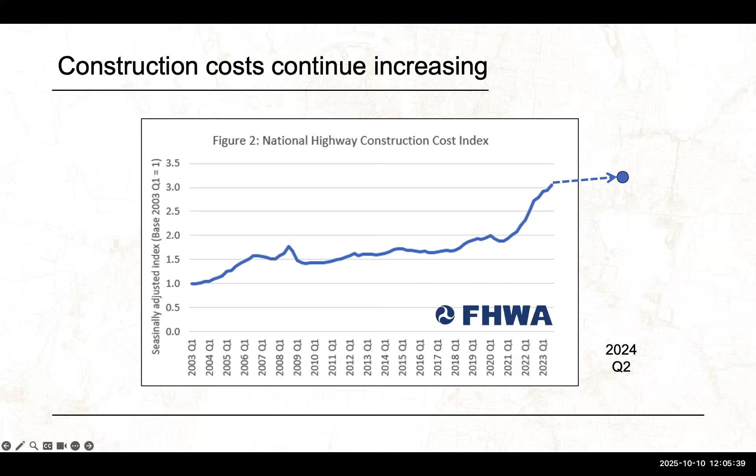All right, I'm going to start off with a nice graph here. This one's from FHWA. This is showing the cost of road building relative to what it was in 2003 and adjusted for inflation. So the trend of building hard infrastructure, paving our roadways and putting up signage and traffic signals and everything has continued to increase. And that trend has continued a little bit. It's flattened off a bit, but overall, building things out in the world is getting more expensive. And paving a new lane on a roadway is more expensive than it's ever been.

A guiding principle of our work is what technology can do to increase the capacity of our roadways, instead of building another lane, which we know is very costly, and we'll end up in this problem of induced demand. You build another lane and that one will get filled up as well. This is a very common theme amongst transportation. Not saying we never need another lane or additional roadway capacity, but what can technology do for us, and maybe do a little bit cheaper than building additional pavement.

The other thing, if you've ever taken a traffic flow theory class or a traffic engineering class, you might be familiar with the fundamental diagram in traffic flow theory. This really tells us at a high level that when you put more and more vehicles onto the roadway and those vehicles become separated by smaller and smaller distances, that's traffic density, so the number of vehicles on the roadway for a given area. When traffic density continues to increase, we can maintain kind of free flow speeds for a while, and then we start to see those speeds drop off precipitously.

So as we continue adding vehicles to the roadway, we'll eventually see the speed on that roadway kind of fall off a cliff, and we get this kind of congestion that we've all been very frustrated by many, many times. So this is another one of these guiding principles, whether we can use this fundamental relationship in traffic to our advantage. Can we get technology to help us with the fundamental laws of traffic and keep us in our nice free flow speeds where everybody's getting where they need to as quickly as possible, and avoid some of this congestion that everybody finds annoying and that ultimately is unsafe? So we'll talk a little bit about how some of our work fits in there, but these are some of the guiding principles that have motivated this talk.

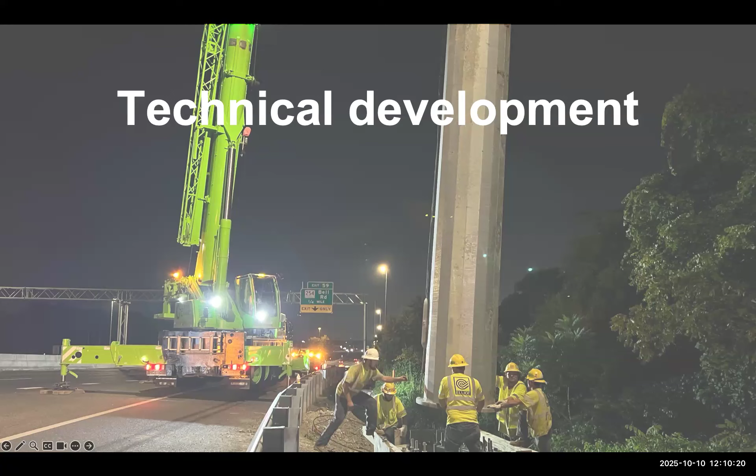So I was kind of out here with the contractors during the building of I-24 Motion and involved in the development since day one. The ITS industry, we know how to hang up a camera to observe traffic. We stick a pole in the ground, you stick some concrete under that pole so it doesn't fall over, you aim the camera at the roadway, and we get this nice view of what traffic looks like. Those cameras, you can pan them around, you can zoom in further down the roadway. And these are really helpful for incident management. And so the traffic management center knows what's going on out on our highways.

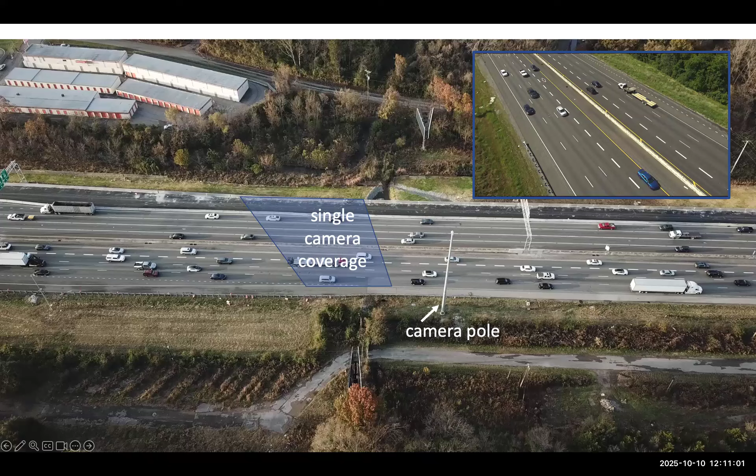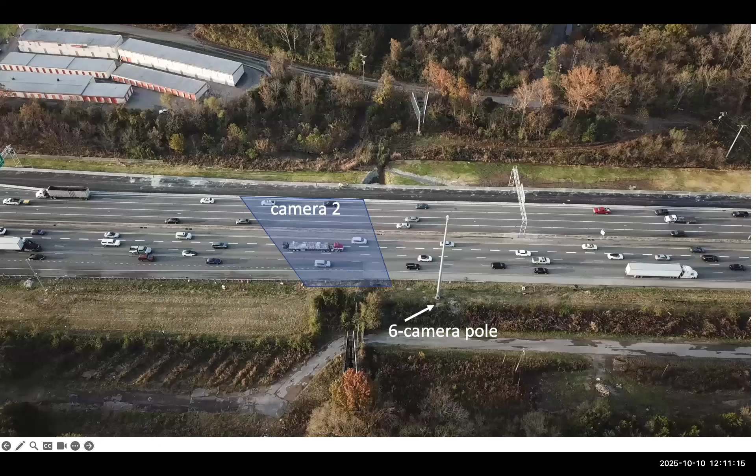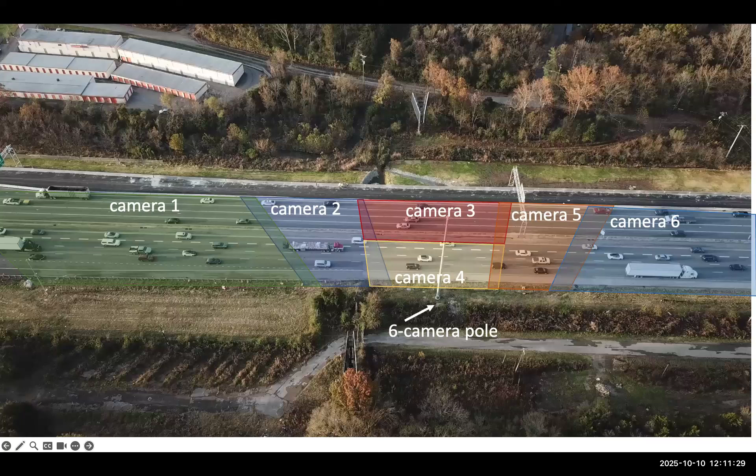However, if we're trying to get sort of observability into all of traffic all at the same time, we need a couple more cameras. This one isn't going to cut it. So again, we start with one, and we need to figure out a way to get a few more up there. Well, this is pretty easy. All we have to do is just bolt them on. Why should this be so hard? Well, if we can do that, all we have to do is duct tape them up there, and we'll get this nice, larger coverage of a patch of roadway from one single camera pole. This will help on cost, so we don't have to install hundreds of these steel poles up and down the roadway. We just have to figure out how to get those cameras up there.

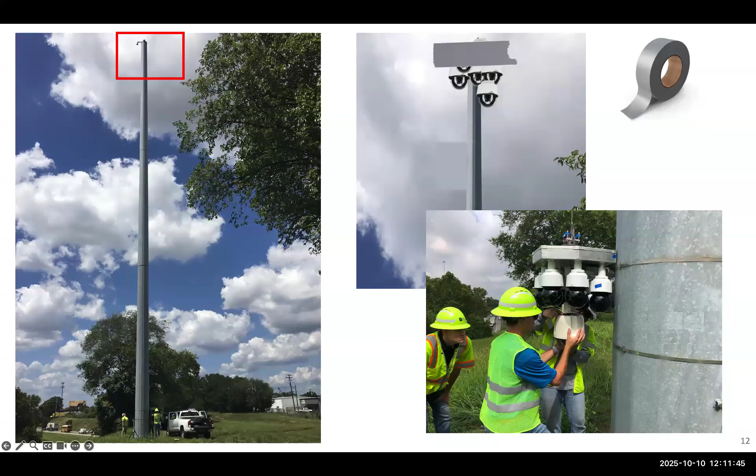We don't use duct tape. We don't even use bolts. This was our very first prototype for actually how to fit 6 cameras up on a single pole. This design did not exactly persist. It was a little bit more fragile than we thought. So we worked with a company down in Alabama to actually make a custom product to hold 6 cameras up on a single camera pole. They're a great partner, and we went through a couple design iterations, and we call this thing the Beetle because it's got 6 legs and holds 6 cameras. But it does a great job of letting us get more pixels on the roadway, use fewer steel poles in order to do that, and let us cover more roadway in this camera coverage.

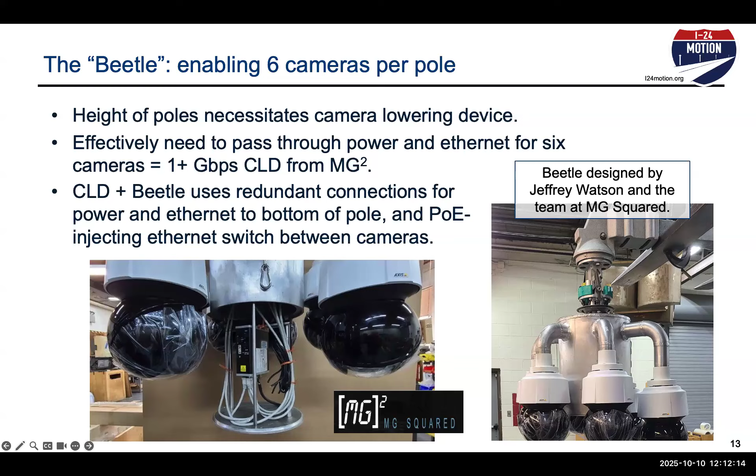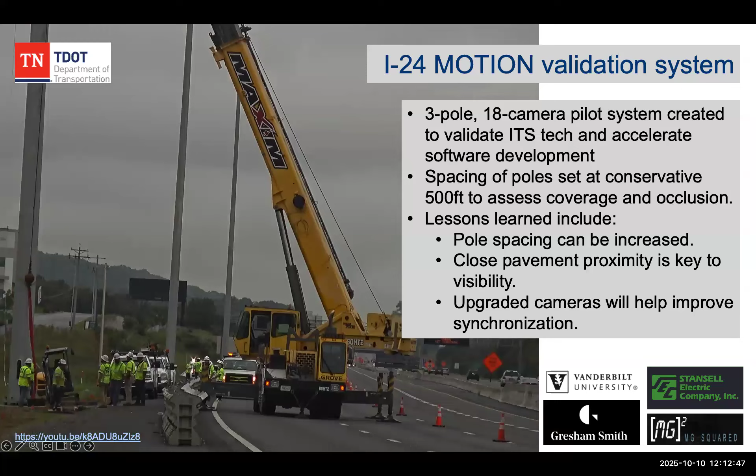When we're actually getting those poles up, this is quite an endeavor because these aren't small steel structures that we're putting on the roadway. These are 110 to 135 foot tall poles. The 135s for I-24 Motion are actually the tallest in the state for traffic. So this is quite the engineering project as well. If you're wondering why they're 135 feet tall, well, they come in 3 pieces, and that's as much as you can fit on a single flatbed truck without getting an oversized permit. So we asked how tall can we make them, and somebody told us 135 feet. We said, all right, deal.

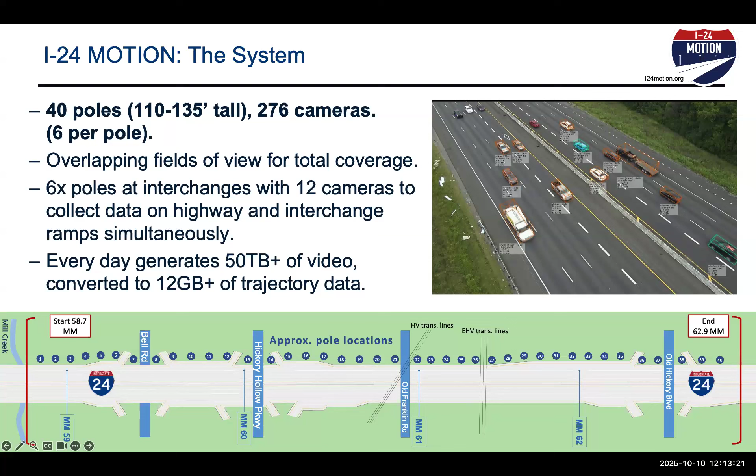So this is a video of us hanging up the first 3 poles. This was part of our validation system. We then started construction on the full system in 2022 and commissioned all 40 of the poles that are part of the core system. That's 276 cameras across all 40 of those poles. We commissioned that system in late 2022, just in time for one of the other projects I'll talk about here in a little bit. But these are laid out across 4.2 miles of I-24, and there's not a single inch of that roadway that we can't see from one of those cameras at a given time.

So we talked about the engineering side, getting these cameras up, and the hardscape and all the materials that go into this. And then there's the cyber side, where we actually pull these data feeds into a data center, and we need to run computer vision tracking on every single object that we can see in all 276 cameras. That is no small feat.

We're even making this harder with trying to do this in 3 dimensions. So we try and get the 3-dimensional bounding box of every single vehicle. And that 3-dimensional box is important because we don't really care where approximately in the image the vehicle is. We want to know where its front and rear bumper are, how wide it is, how tall it is, how long it is, and track that really precisely along the roadway.

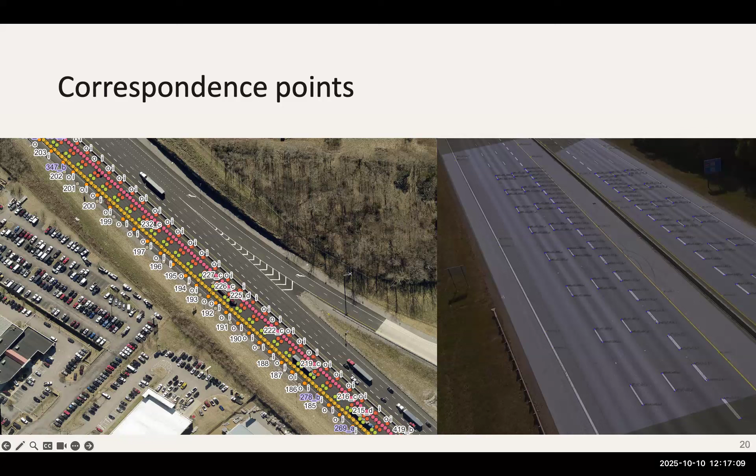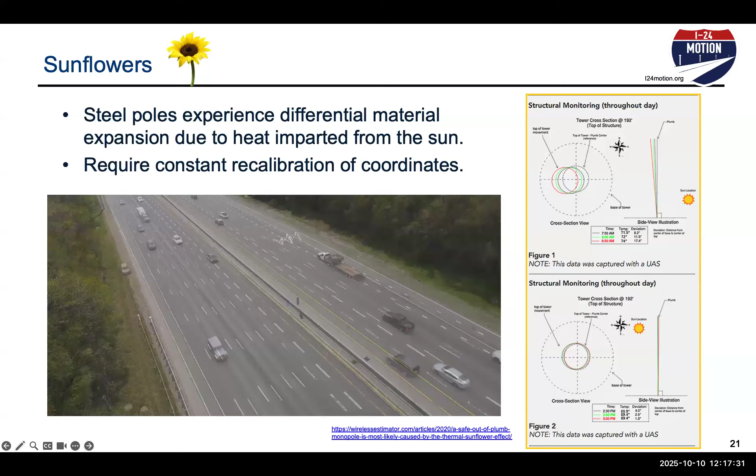So we actually had to develop sort of an auto calibration that uses this initial calibration and constantly reevaluates it every second in order to determine how far the pole is leaning over. You can see this is two images superimposed, and our lanes will actually move by half a lane. So we can get a serious shift in where those vehicles would actually be detected. So this is just one of 1,000 really annoying engineering rabbit holes that we had to go down. But we eventually got all this working.

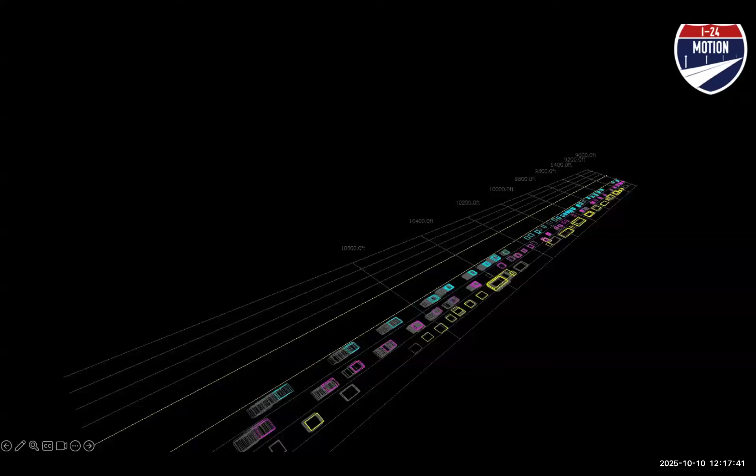And this is actually an early video of what that result is. Once you get all those vehicles correctly localized to the roadway, we can watch every detection. And ultimately, we smooth out these detections. It's a little bit noisy, so we have to massage that data a little bit. But this is what it is after we do that tracking and then localization to a virtual roadway.

All right, what students have seen a time-space diagram before? Yeah, okay, good. All right, so for some of you, this will be new. For some, it will not be. Imagine we lay our roadway out on one of the axes of a two-dimensional plot here. So on the vertical axis, I'm going to give you the roadway, sort of linear, take all the curves out of it, make it a nice line, and put that on your y-axis.

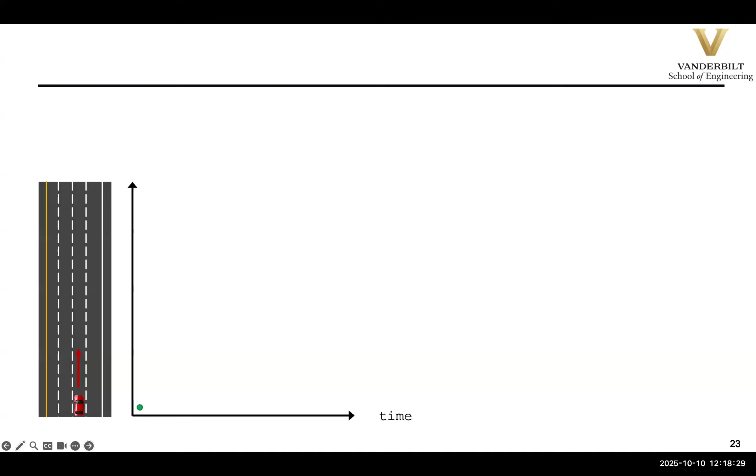Put time on your x-axis, and we're going to plot the position and time of a vehicle as it moves along the roadway. So our little virtual car here is cruising right along at 60 miles an hour, and he has these nice uniform spacing of points. He covers the same space in the same amount of time. Delta x over delta t is the same until he reaches a point where he starts slowing down.

So in this case, I illustrate this as a lane change, but we lay that roadway out, all lanes in the same plane. But if that car is slowing down or encounters a traffic jam, for instance, we'll see the slope of that line start to bend, and it'll start to flatten out.

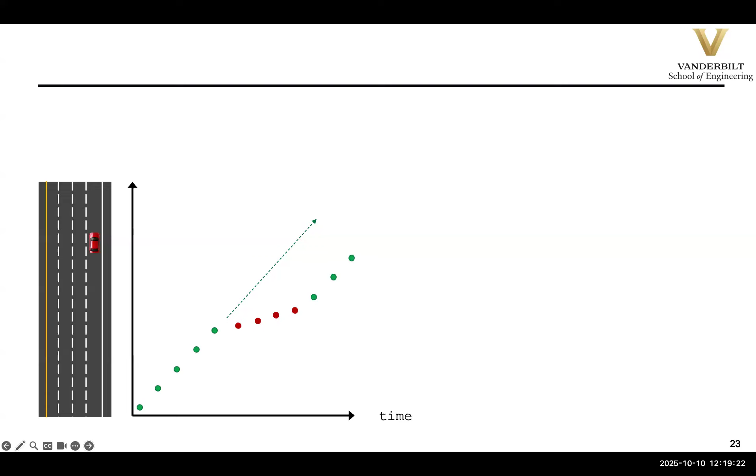And in fact, if he completely comes to a stop, we'll see a perfectly flat line because time is advancing and he's going nowhere. So this is how you read one of these time-space diagrams. If he starts up again, then we'll see that line, the slope return to its kind of free flow speed. So we're just measuring slope here, and we can do that for the I-24 MOTION system.

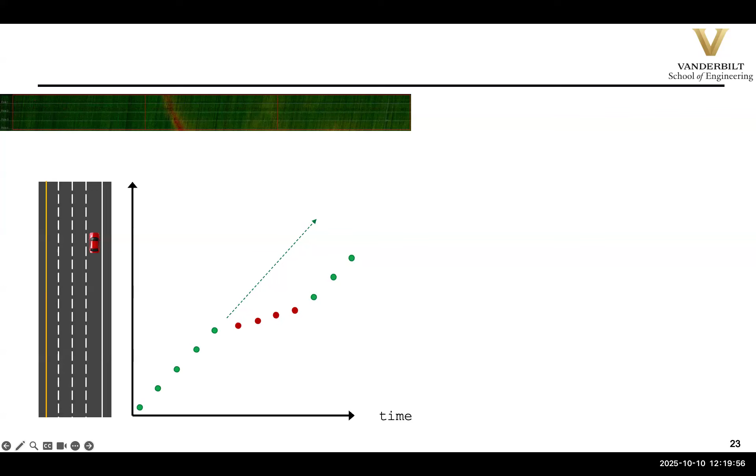This tiny little diagram up here are some of those trajectories for individual vehicles, except I cropped this photo by basically the amount of data that the traffic flow theory community was using that was of this same quality. So individual vehicle positions over time. This is how much data we are dealing with. So y-axis is space, x-axis is time. So we had about 45 minutes across, I think it was 1,500 feet. So small data set. And this was the first day of I-24 MOTION on the same scale.

So we have 4.2 miles of roadway on the y-axis, and you'll see on the x-axis, we have, in this case, I think about 6 hours. So this is actually morning traffic. What you're going to notice here, all these nice straight green lines here are free flow traffic. And then these red streaks here, we'll examine one of these once this comes to a stop, but these red streaks are traffic waves. So they're moving traffic jams.

If you can envision somebody coming to a stop behind you in a traffic jam, and behind them somebody else coming to a stop, and another car and another car, we start to build this queue, and that queue builds backwards along the roadway. So our vehicles are driving in this direction, kind of towards the top right of the image, and our traffic waves are actually traveling in the opposite direction, backwards along the roadway as time advances.

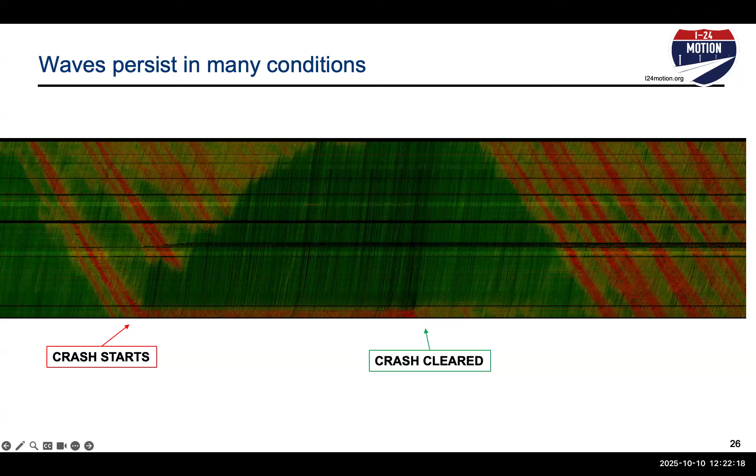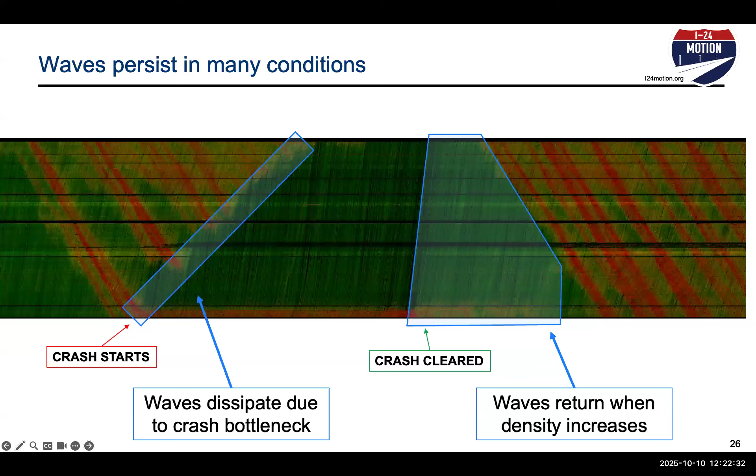You see this kind of sparse area. There are definitely vehicles going through, but there aren't as many. You can just tell by kind of the density of green there. Well, that crash is cleared at this moment, and all those vehicles rush through where we previously had a bottleneck. They rush through, and traffic actually returns to this traffic wave state. So we created a bottleneck, choked off the flow, and then as soon as we opened that back up, these traffic waves returned. So we see this quite a bit.

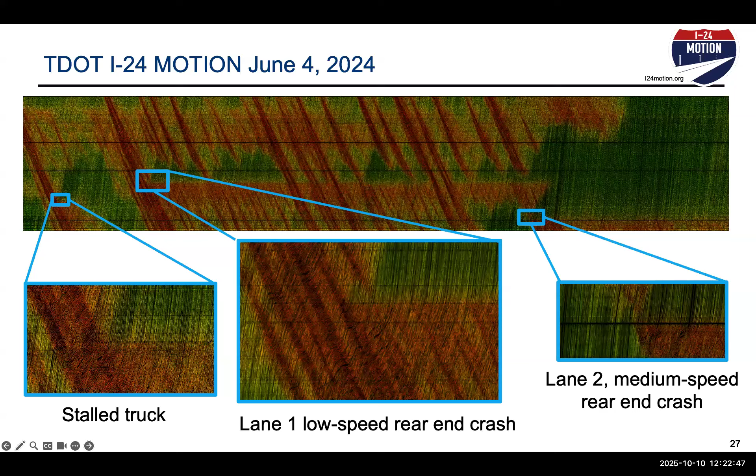In fact, here are a couple other sort of phenomena we've seen. This is just a very low speed rear end crash. However, that causes a lane to be blocked. It causes police activity, and we see these things day in and day out. We can look at months of this data. In fact, we have hundreds of days of it at this point, and we see crashes all over the place. So once you get kind of good at looking at these things, we look at them every single morning as the data is produced. You see crashes without a moment's hesitation. So I-24 is a really rough, dynamic roadway. It's not very pleasant to drive, and this is one of those reasons.

So this is all about traffic observability. And let's segue really quickly into the I-24 Smart Corridor. You might be wondering, well, this is fine and good. You observe traffic, you see these phenomena. What do you do about it? So the Tennessee Department of Transportation embarked on the I-24 Smart Corridor project back in, oh gosh, it's been quite a while, I think 2018 kind of era.

And their intention here was adding another lane to I-24, which was going to cost about $2 billion at the time. So $1 billion per side to add one more lane. If you're wondering why it's so high, well, the roadway slopes off really dramatically on that side. You have to acquire right-of-way property on that side because the roadway is already kind of at max width. You'd have to rebuild bridges and interchanges. It'd be a ton of work to add one more lane to that highway.

So can we use technology, again, coming back to our theme, can we use technology to increase the capacity of that roadway, smooth out traffic, make that commute more pleasant for everyone? So that was the overall objective with I-24 Smart Corridor. And the way that we went about that was installing digital message signs along the roadway, and they're actually in these sort of clusters of smaller digital heads. So they're not that full lane spanning message board.

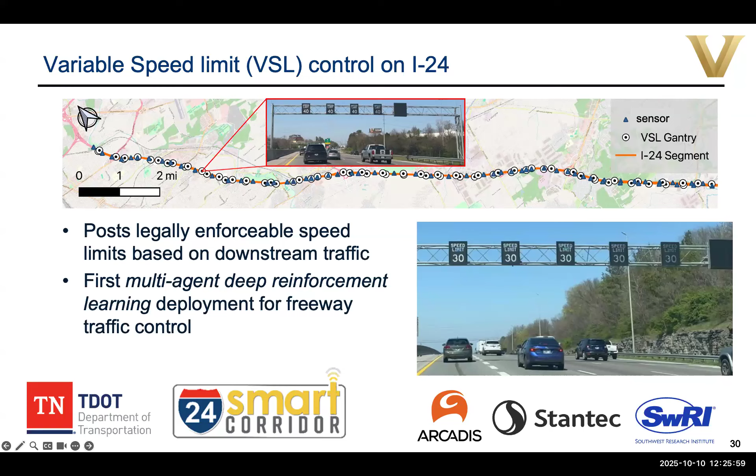So we wrote this software to implement this AI algorithm in 2021 and 2022. And it went live in early 2023. So what I'm going to show you today are the results from that deployment and what positive effect, if any, it had on the roadway. Spoiler alert, it was positive. Otherwise, I probably wouldn't be talking about it today. But this has been a really great project by the Tennessee Department of Transportation because it achieved the exact objectives it set out to do.

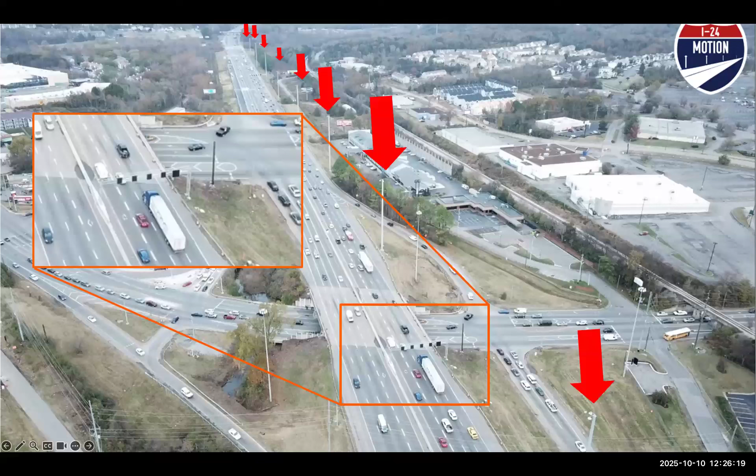So you've seen this photo before. Here are all of our I-24 MOTION poles, or 8 of them at least. Well, here's one of those gantries inside of that I-24 MOTION system. So these two systems overlap. I-24 Smart Corridor is like 30 miles long. I-24 MOTION is only 4. But the co-location of these two systems gives us some interesting opportunities.

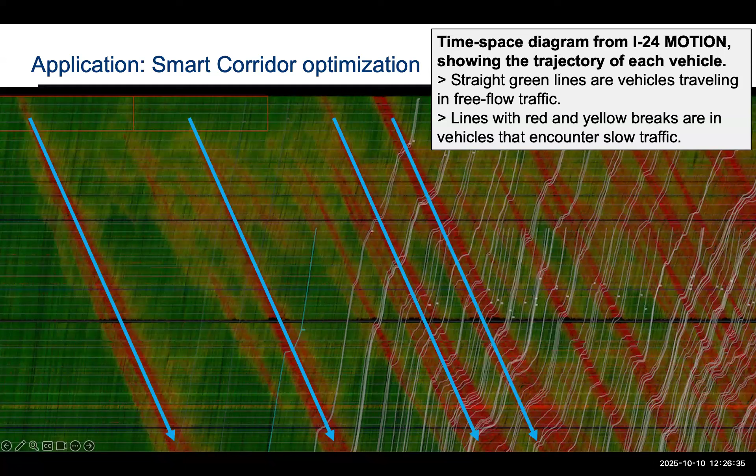You remember this photo as well. Here are our traffic waves. Well, you might have noticed these things all look pretty similar. Again, they're traveling backwards along the roadway, but they appear to be doing it at roughly the same speed. This was an insight that we used to help tune this variable speed limit system. These traffic waves are actually very predictable. They go backwards along the roadway at about 12 miles per hour. The range is like 11 to 15, but the mean is about 12.

And that 12 miles per hour equates to going from one gantry to the other. They're spaced a half-mile apart, so going from one gantry to the other in about 2.5 minutes. So if we just know where that traffic wave is going to be in 2.5 minutes, then we can start to be proactive about some of these potentially dangerous traffic waves. People could be cruising along at 80 miles an hour and come upon one of these things, and if they're not paying enough attention, they don't hit their brakes hard enough, they could cause a rear-end crash.

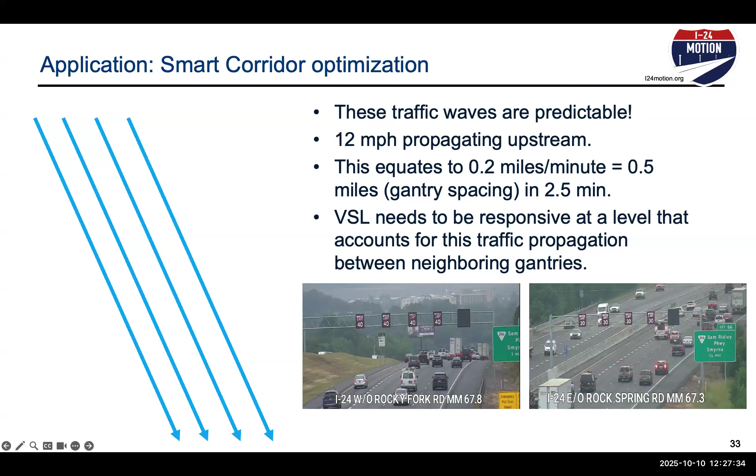So these traffic waves are worth notifying drivers about, but they happen really quickly, and we have to make really fast decisions about what to do. So we have to keep the variable speed limit system really responsive to these conditions. And we use an AI technique called multi-agent reinforcement learning. I will save you the math of how all this works today. If you're curious, we can go find a whiteboard after the talk. But I'll give you the high level here.

And that is that we have a reinforcement learning agent. We said multi-agent, so there's going to be more than one, but we'll have one for this variable speed limit gantry here. That gantry is going to tell drivers at this location what traffic conditions are roughly up ahead.

And we can't just tell them, all right, well, you're going 80 miles an hour, you should be prepared to go 30 miles an hour in just a quarter of a mile. So we have to enforce some kind of patterns to this and make sure that we give drivers enough advance notice. So that reinforcement learning agent is responsible for posting a speed limit on that gantry right there. And it's actually going to look at traffic conditions up ahead of where it's posting that message.

And so we kind of run these step by step, and each agent in the multi-agent reinforcement learning setup here is responsible for its single gantry. And so they're all looking at both each other as well as traffic conditions. So we can do this over and over again, 67 times. It takes, I think, about 20 milliseconds for this to run.

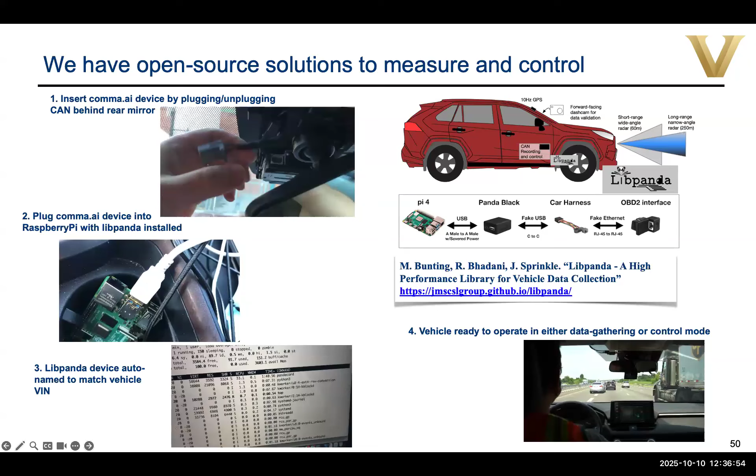So the variable speed limit system is great. It's informing us of traffic conditions up ahead, and drivers could go ahead and drive this themselves, but we could also get our vehicles to do this. Does anybody have a car with adaptive cruise control, one that kind of monitors the space to the vehicle ahead of you? Yeah, so it'll automatically control your speed based on what the vehicle ahead of you is doing to make sure that you're following at a safe distance.

Well, these adaptive cruise control systems, we can actually hack these a little bit. And instead of going the set point that you set using your steering wheel, why don't we just make it go the exact speed that the variable speed limit system says? So the variable speed limits are telling us what are our traffic conditions.

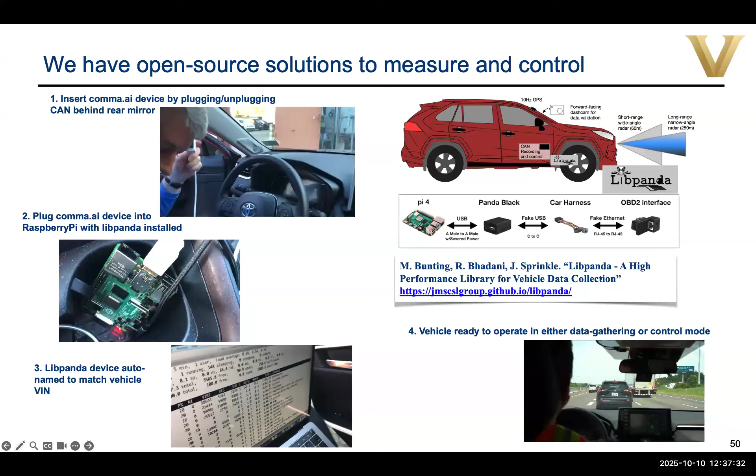Well, if we just drive at the average speed of traffic up ahead, then we can do this rolling stop kind of thing, come right to the back of the traffic wave as it's dissipating. And the hope here is that we can start to dissipate these traffic waves. That if enough people do something like this, then we could actually make that traffic wave go away and pace traffic in a reasonable way.

We call this the middle way, and somebody got really creative with the name of a paper and called it the middle way to traffic enlightenment. All right, I'm not here to debate the veracity of that title, but the middle way is a good characterization of what this is, because we're basically going to infrastructure speed, except when traffic around us is going really fast.

We don't exactly want people giving us the middle finger all day, so we're going to sort of split the difference. If traffic around us is going way faster, we're going to speed up a little bit, just so that we're maintaining safe control around that and not encouraging people to make dangerous moves. So that's that middle way. And when we run this, I won't spend too much time here, but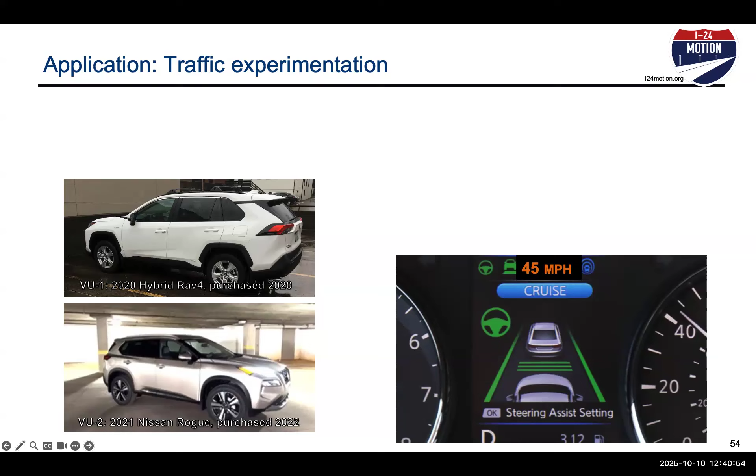We installed some hardware that basically allowed us to use their adaptive cruise control system and constantly change the set point of that adaptive cruise control system. We could also change the following distance between the two vehicles. So we have a couple levers to work with here. We designed a cloud system that runs and looks at traffic conditions up ahead and gives those traffic conditions to the vehicles as their desired speed profile.

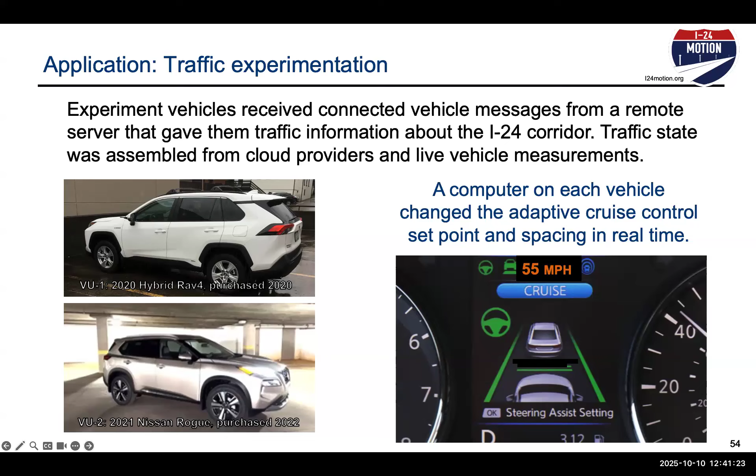So we put all these cars out onto I-24. So we had 100 drivers. These cars aren't fully autonomous. This isn't Waymo. This is 2022. And so we got 100 drivers in all 100 of those cars, put them out on I-24, and they were driving laps around the interstate. We added those 100 vehicles to the traffic stream with the intention to smooth out these traffic waves that we knew were out there because of our system with I-24 MOTION.

So this is putting into practice these principles that make a lot of sense, but the problem is it's tough to do at scale. So this was one day of that experiment. It was a huge undertaking. It took like 100 staff just to make this happen, plus the 100 drivers. There were a ton of different departments to the experiment, somebody designing the algorithms, others working on the databases. But it was a huge undertaking.

But ultimately, these drivers went out there, smoothed out traffic waves, and actually decreased the overall fuel consumption of the roadway. I forget the exact statistics there. It was a lot of data analysis to actually tell what effect they had on the entire roadway. But it was a positive effect. They killed multiple traffic waves. So those traffic waves where we would expect them to just continue were actually fully dissipated. And then there were other situations where those traffic waves were kind of alleviated.

And instead of coming to a hard braking event and then re-accelerating, we're kind of able to slow roll that traffic wave, and it might not have gone away completely, but we reduce fuel consumption of the overall traffic stream and also improve safety. So I think the fuel consumption gains here were something like 5 to 10%, which doesn't seem like a lot, but this is tens of thousands of vehicles driving through here.

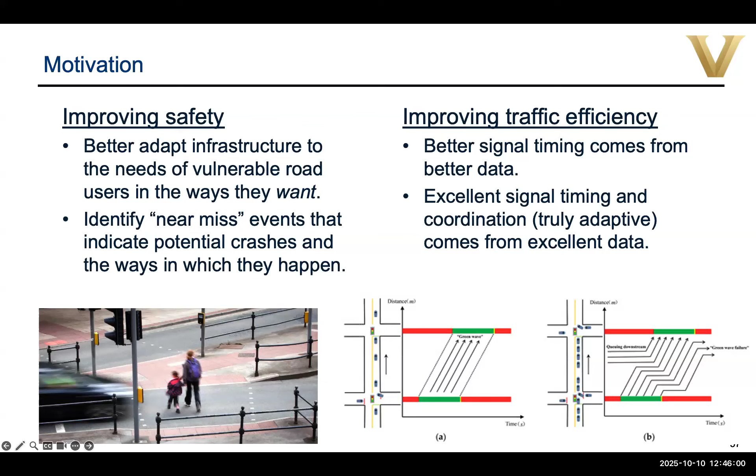All right, the technology that we've been using for this, and I will preface this with, this is not the only technology that would be appropriate for something like excellent traffic signal observability and near miss detection. There are other technologies that do this and can do this very well.

But one of the things we've been working a lot with is LiDAR in the ITS realm. So in intelligent transportation systems, we've got lots of different sensor types. LiDAR is kind of a new entrant to the ITS detection space. LiDAR has been used for many years on sort of high-level sensing or terrain detection. The Tennessee Department of Transportation actually flies planes with LiDAR on them to get the topography of the entire state. They fly different counties and zones every single year.

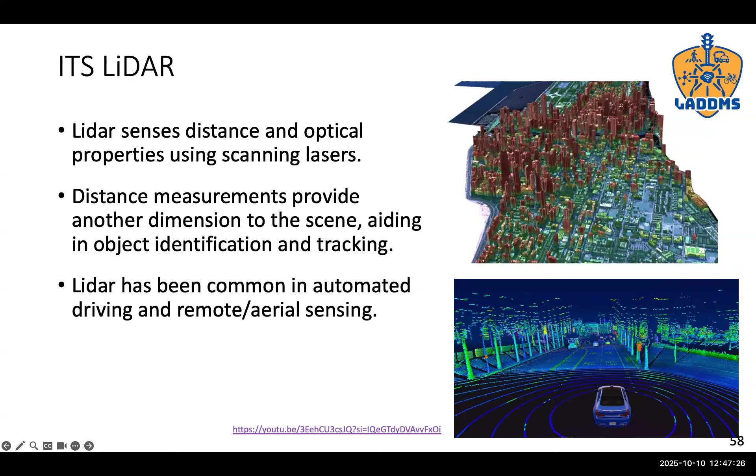And we can do this to scan urban areas and such. Automated vehicles also use LiDAR technology. So one of the reasons they really like LiDAR is that it creates a nice three-dimensional picture of the roadway constantly. And it does this because each laser that it's sending out as a sensing point actually gets an exact distance when it returns. So they're scanning 128 lasers constantly around in a circle, and they're building this 3D map of the world constantly. So it's very helpful for an automated vehicle that needs to understand the spatial relationships between things on the roadway.

But we can also use this in an ITS context. So we stick a couple of these LiDAR sensors up on our traffic signal poles at an intersection, and we can get a perfect 3D view of what that intersection actually looks like. Within that 3D view, we can detect objects. We can detect vehicles, pedestrians, cyclists, scooter riders with pretty good precision. These LiDAR devices have come a really, really long way in the last few years, and they're really powerful for the ITS context.

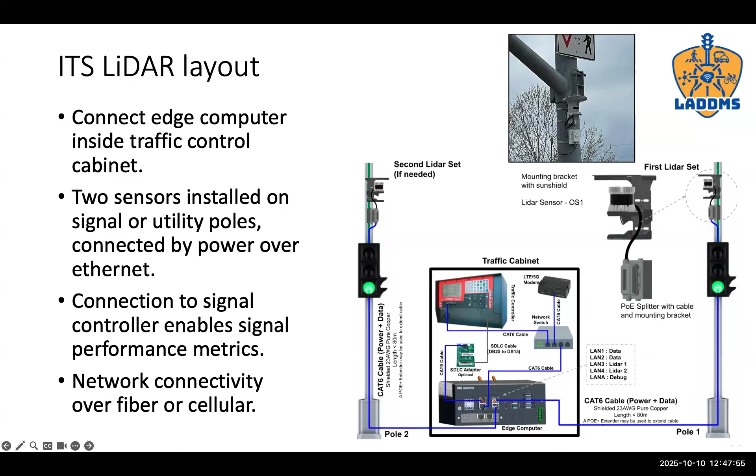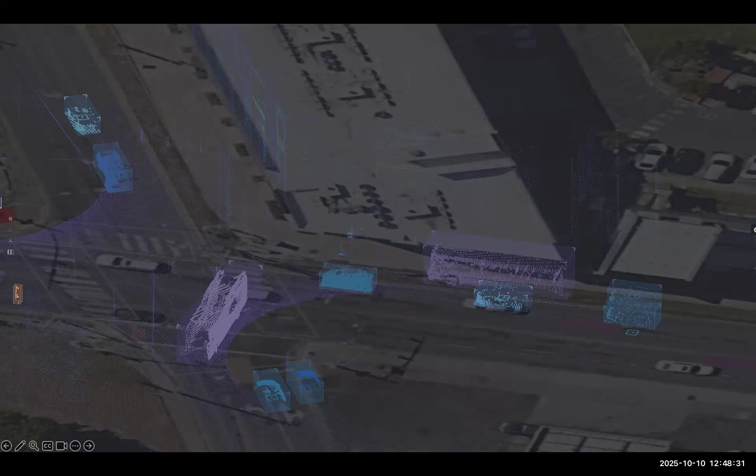All right, and because we're getting detections of vehicles and all road users, we can use those to track those objects. If we track those across an intersection, then we'll get thousands of little traces of vehicles making turning movements and crossing the intersection. And these trajectories are really helpful for analyzing things for engineering purposes. Do we need a stop sign at this location?

In fact, I believe we just finished up the analytics for this one recently. They were saying, oh, we definitely need a stop sign here. We just need to count the vehicles and all the turning movements and everything. Well, it turns out actually there wasn't enough volume to justify a stop sign there. So anyway, you can collect thousands of vehicle trajectories pretty easily.

And from that, we get our turning movements, we get speeds, we get crosswalk usage for pedestrians. We can also get signal performance metrics. How many people arrived on the red light? How much time did they have to wait? This is really, really powerful data.

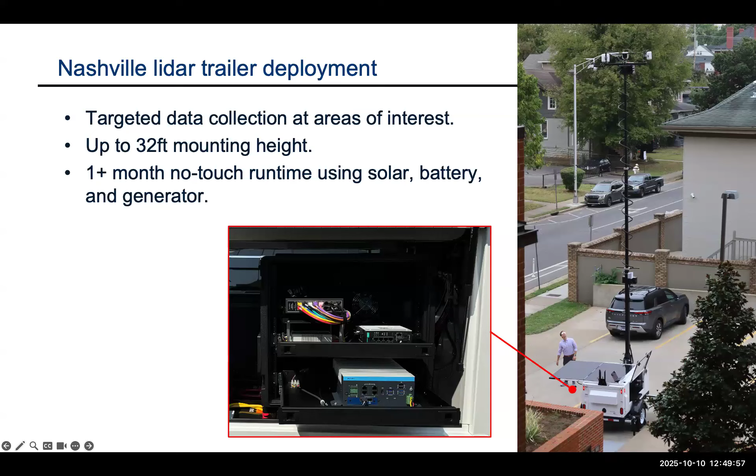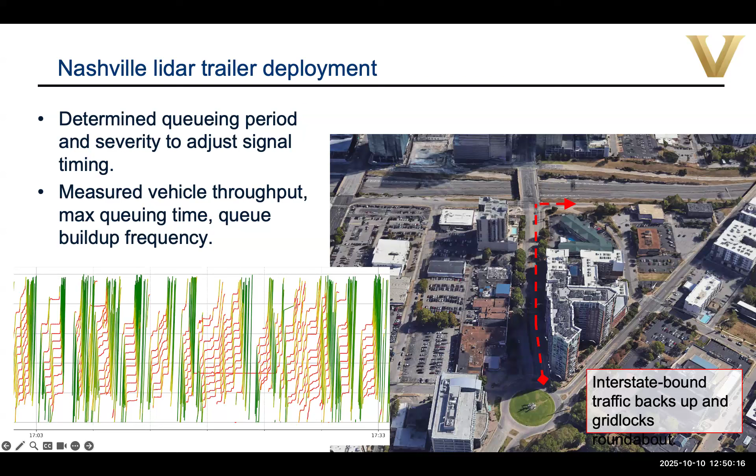All right. We also installed LiDAR on a mobile trailer that we tow around town, looking at different areas that the city wants to investigate. One of those areas was leading up to an interstate. And again, you see these nice time-space diagrams. These are ones that look more like a signal that's constantly cycling. You see this section of red followed by a section of green. That's vehicles arriving at a signal, getting queued up one after another, and then getting released. So we were studying the interstate on-ramp here and trying to adjust that signal a little bit.

Well, let's jump ahead to something kind of recent. I did not come up with this name. It's a little bit silly, but hey, it's fun.

Downtown Nashville is a fun place. We have Lower Broadway there. That is a pretty wild roadway. If you've ever visited Nashville during a special event, Broadway is just completely crazy. That is a good problem. It's definitely a management challenge, but would you rather have downtown bustling with activity, or would you rather have it kind of slow and dead? So we definitely lean into the bustling and eventful kind of side of this.

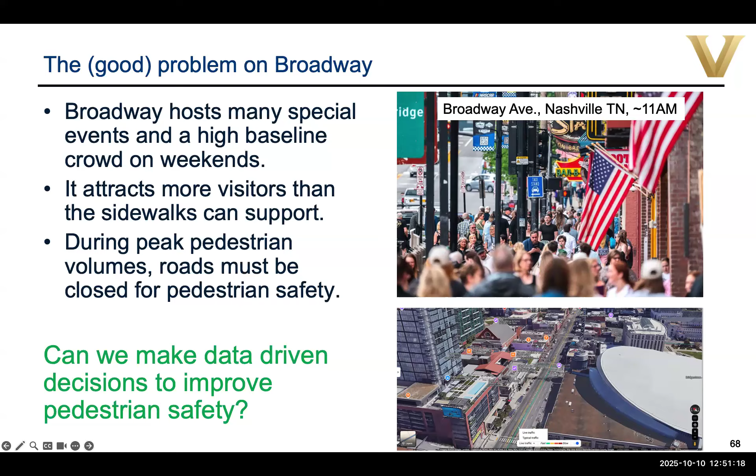But we also have this problem where we have too many pedestrians for the infrastructure. Just as we don't build roadways for peak hour flows, we don't build sidewalks for special events. We just don't. They're not big enough. Broadway, the roadway in downtown alone, will have 100,000 people on it during a special event. Downtown Nashville on its own will have peak crowds of over 300,000 people.

The July 4th fireworks show this year had 360,000 people in downtown Nashville. They shut down a portion of the interstate because in the last year, people would actually stop on the interstate to watch the fireworks, and they're like, that's a bad idea. So they actually shut it down and didn't allow anybody up there. But this is CMA Fest. There's this absolute sea of people. It kind of looks like a zombie apocalypse in a way.

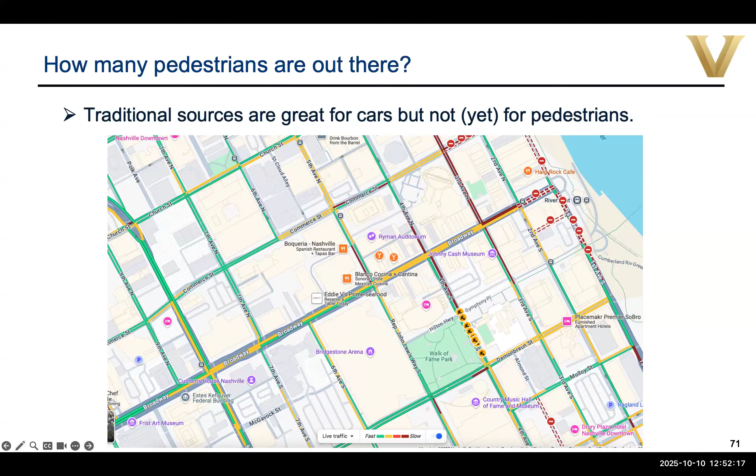And it's tough to measure too. All those people, they don't really show up on Google Maps. This is traffic, but I guarantee you it's not actually moving nice and free. It's probably having a tough time with the thousands and thousands of phones that are reporting various movements down there. So this sort of data source isn't super great for what our pedestrian volumes look like and how we can best manage something complex like this. And helicopter flights are also really expensive. Helicopters are a great way to get a view of the roadway.

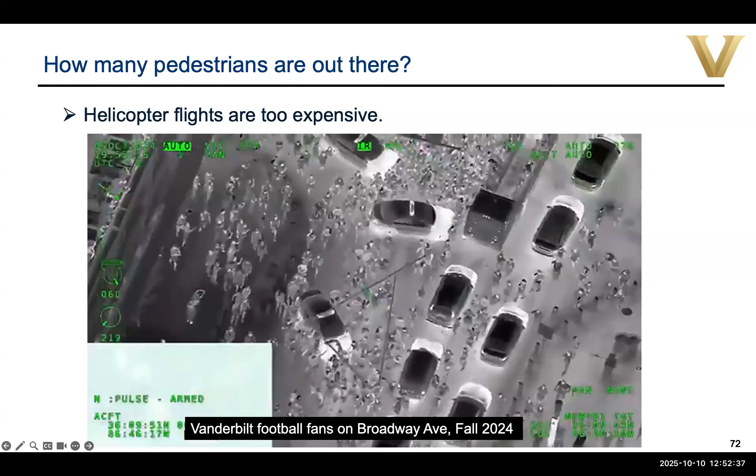If anybody has seen this clip, this is when Vanderbilt beat Alabama. Yeah, it's a year later. We're still showing this. We're very proud of it. Couldn't get the repeat, but we gave it a good shot. But this is in 2024. The police let them carry this all the way down to the river. Had to try and mirror our friends in Knoxville. So it's a Tennessee thing. We tear down goalposts and throw them in rivers.

So anyway, this is another kind of zombie apocalypse moment, especially in the night vision. It's just almost a little bit scary. They're climbing on cars and stuff. It was wild. Anyway, it's a little tough to get a helicopter up there for every night on Broadway. So we started installing LiDAR on Broadway. Here's a shot of somebody from the Nashville Department of Transportation getting that sensor up on one of these signal poles. So we did this across 5 intersections, installed 10 LiDAR scanners, networked these back to the traffic cabinets that are already out there, got these on the fiber network.

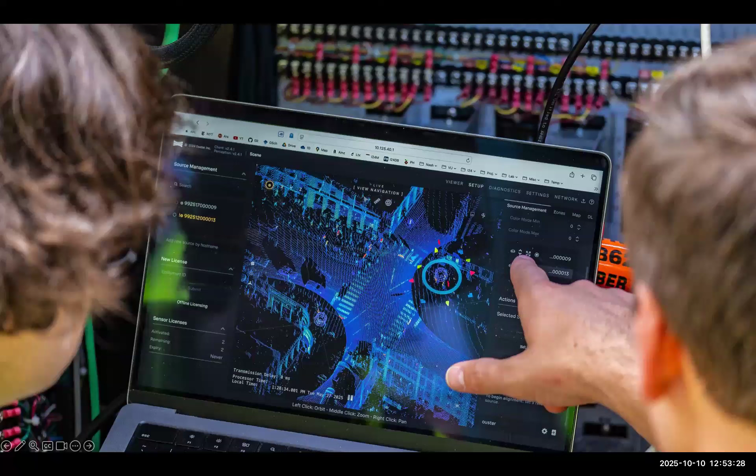This is us calibrating a couple of these sensors in the field, and we get this 3D representation of what Broadway looks like. Well, we don't really care where the buildings are as much as we care where all the people are. So this is the overhead view of one of those intersections as soon as we installed it. A couple hundred people through an intersection, not super crazy for Broadway. That's normal traffic. And vehicles that sit at stoplights for 30 seconds, that's normal traffic for Broadway.

So we see people on the mid-block areas. Even though our sensors are installed here at an intersection, we're seeing people between the intersections as well. We're using longer range scanners to make sure that we can get a full picture of the roadway. And we built this software that lets us observe this picture of what the roadway is doing from a top-down perspective. Inspired by that 3D representation of a single intersection, we did a 3D representation of the entire roadway. This also works for all of our other installations around Nashville.

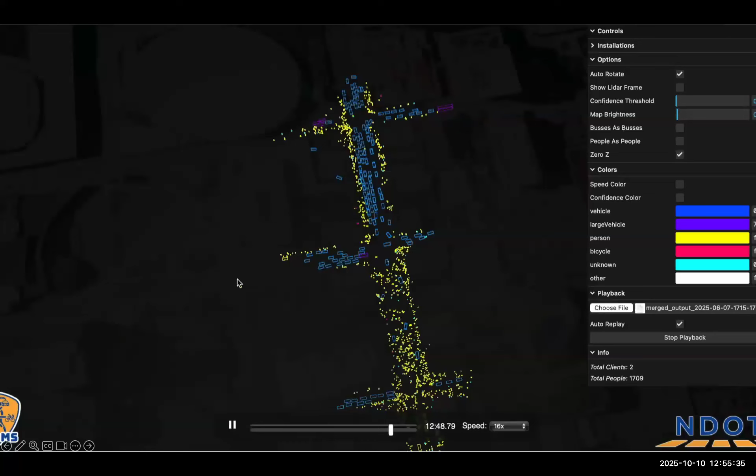So this kind of ultra fast replay, you can't run this in real time, of course, because we can't show data faster than we can get it. But after the fact, we can learn a lot about how the roadway operated when we replay data like this. It's also very useful from an operational standpoint in a traffic management center, seeing your kind of overhead view of what Broadway looks like, as opposed to trying to kind of assemble the picture in your head based on a bunch of separate traffic cameras.

This is sort of a new capability. So I'm hoping that this very new capability we can kind of roll out for the next generation of traffic signaling in our cities. So again, this is not the only technology that can do things like this. It is one of 3 or 4 that produce this level of data. But if we can start to blanket our cities in this kind of coverage, then it opens up a whole new realm of what we can do for traffic signaling.

Today, we rely on patterns. Well, we could in the future potentially have AI that just constantly adapts the signal system based on all the data that it's seeing citywide. That's a very tall order. That's years and years down the road if it ever happens. But I'm kind of confident, or at least hopeful for a future like this, where we can use really excellent, rich data sources like this to kind of usher us into the next generation of transportation.

So with that, I managed to weave together 4 different projects. Sorry for going fast on this, but this is kind of a broad vision for potentially what we could see in the next generation of traffic that I hope some of you will be working on yourselves.